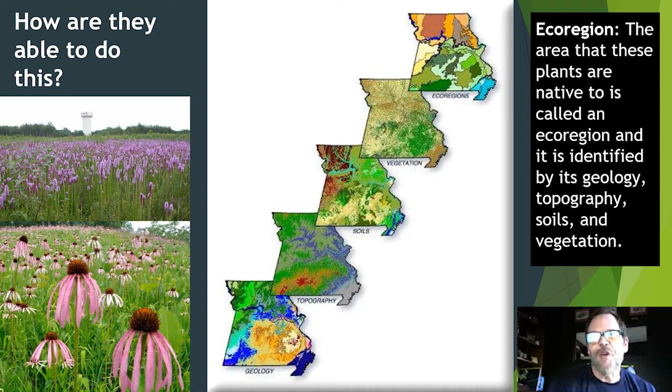So we walk through and we talk about the effects on our local waterfowl, on our local birds. We talk about the different things with our local insects, and how just planting these areas with natives is not only great for the environment, but affects all the things in that environment.

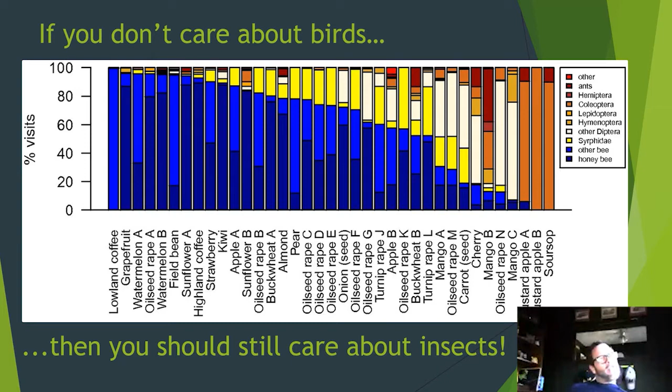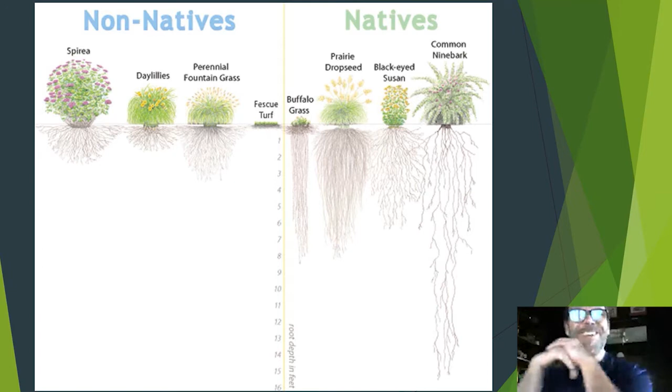Again, because of our soils here, we explain to folks how they root down. When you plant mums or something you picked up at Lowe's, the maturity of these plants as they grow takes some time, a couple of years in some cases, but once they take root in these spots, especially in rain gardens or adopted spots, they do exactly what we want. They start breaking up our clay soils and letting that water penetrate and percolate down into the water table.

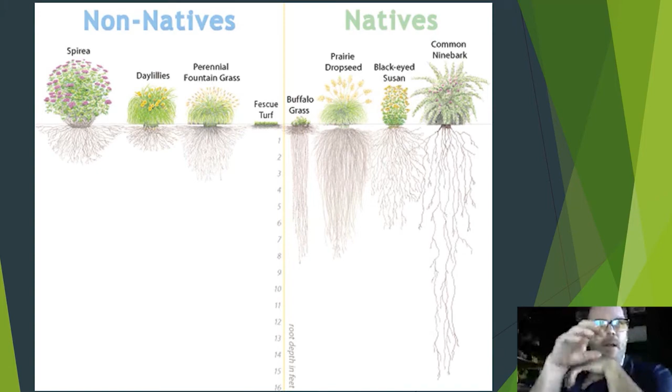We have a great group we work with called Grow Native. They're a local organization, all throughout the state, and they work with different local nurseries and in some cases big box retailers to sell their native plants. We encourage our folks to go out and purchase those plants for the adopt-a-spot and rain garden locations.

This is most of the information I'll get to you after we go. This is their database that we use. We have a list, and we use this list off of here, and we also have a written list, which I'll give to you guys, that we give to our volunteers for where to buy and what they can plant.

This goes into a little bit of detail about how to plant them, and again this tells you where all the retailers are.

One of the biggest issues we have is some of our spots, especially not the rain gardens, people can pretty much plant what they want. We have a very strong core of volunteers. I'd say out of the 100 locations, probably about 80 are very well maintained. Retirees are one of our best, we have a lot of retirees here in town, folks that grew up maybe on a farm or grew up gardening, and these spots appeal to them, especially our rain gardens. They're more off the road, usually set back a bit. These areas become more adoptable, more friendly for families, groups like Boy Scouts, Girl Scouts, when we adopt them out.

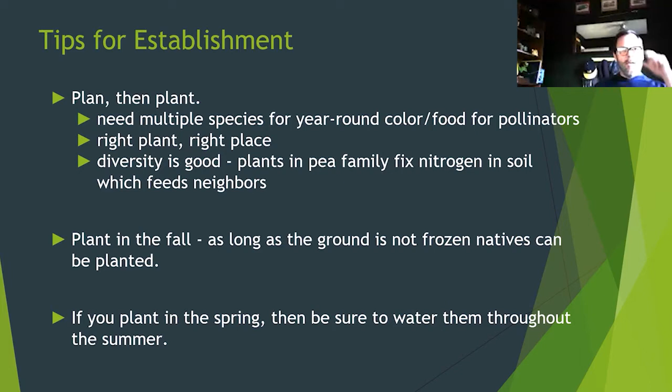We have over 101 beds and 96 of them are adopted. That's a 94% adoption rate. We do provide, through our folks that are in the Adopt a Spot program, a small stipend for their spot.

The $50 that we give them, we encourage them to purchase native plants. In some cases in the past, working with the University of Missouri and different local colleges, and actually one of our local high schools that has a greenhouse, we paid them to grow native plants for us in their greenhouses.

Once they were grown and ready to go, we put an alert out to our adopters citywide and said, hey, we've got 100 of X or 200 of this. They'll work in rain gardens. They'll work in this location, dry, arid locations. They don't need a lot of water. Does anybody want them?

We're always trying to give them opportunities to know that we're there to assist them. But most of these spots, once adopted, unless there are some major questions or someone needs assistance, staff will be made available. We give them their stipend, their location, and the encouragement, and we let them go.

Next slide, please. We also use this as an opportunity to talk about using our drinking water to water plants. In some of our locations, we have water installed - it's a bigger program than just the rain garden program.

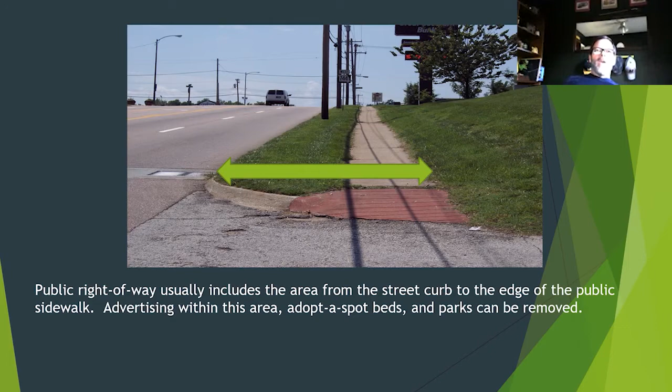We have a great program, and how this ties into our volunteer program is we have a program called Volgistics. If the volunteers are assigned a spot, they're logged into this program, whether they're taking care of roadside litter cleanups, an adopt a spot, or an adopt a rain garden.

They can go into this, schedule their time, say what they did, leave us notes, ask us questions, record their hours, and record how many people were there.

One of our other big events is Clean Up Columbia. We also use Volgistics for that. We have over 15 to 1,700 people citywide go out and clean the entire city, including all of our adopt a spot areas.

The thing about Volgistics, and the reason I use it, is it's a great tool for us when we have to report all our MS4 numbers, because I'm responsible for that in our partnership with the university and the county. So when we do our end of year report to the Department of Natural Resources, keeping track of this with Volgistics covers education, public education and outreach, when you think about MS4s.

So you don't have an adopt a rain garden program, but I bet you might have an adopt a litter program. How many people are participating? Are they picking up litter? How many bags are they getting every time? We keep all of this in Volgistics and they report it. This all goes on our MS4 because it counts. Even if I didn't have the adopt a rain garden program, every litter cleanup, every adopt roadside, that all counts for our MS4.

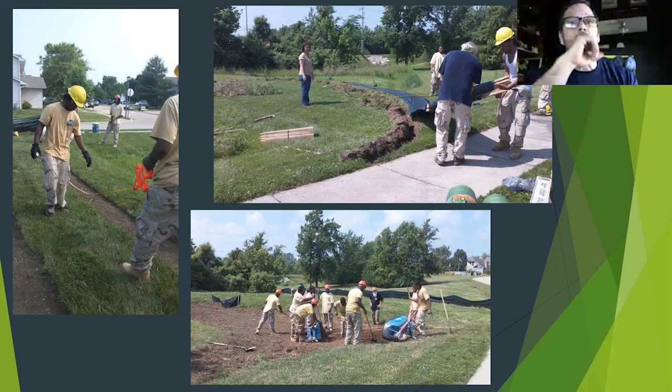This rain garden, after our first rain—we were so excited. We had a local group, and I'm always looking for opportunities to get other people involved. We had a local construction group that teaches young men and young women in the construction trade.

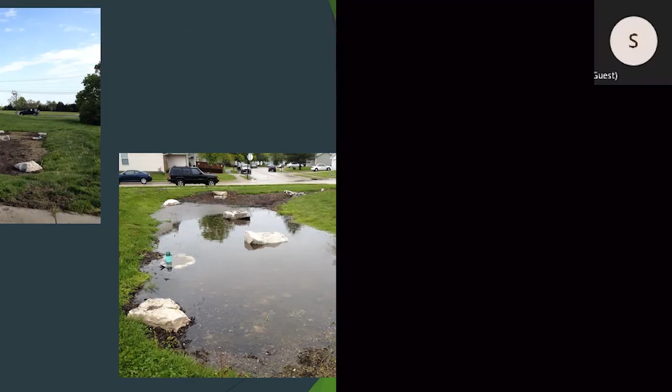When some of these are built, I look at it as an opportunity for us to train the next generation of construction folks: how to install silt fence correctly, what a rain garden is, what retention is about, and why we need sediment ponds on our plat when building or constructing a neighborhood or house to collect runoff.

I'm always looking at these as opportunities to educate the next generation, whether it's landscapers or local construction industries. The other thing that's great with the firehouse locations that are adopted is because of our MS4 permit and our regulations and what we have in our ordinances.

As I said, there are 600-some odd stormwater BMPs citywide. Only 125 or so are owned by the city and maintained by them. The rest of it is for the public to report, inspect, and maintain, and we get those reports once a year.

But these sites have been great for us. We've even had some of our volunteers go meet with folks that own local business buildings that have these installed, and help them, or help the landscaping company, understand the maintenance behind them. It's been a great program. It helps us keep in compliance with our MS4 permit, and it also helps us meet our goals for our climate action plan.

We have a question about Bermuda grass or Johnson grass, since those are invasives here in Texas. Do you have any problems with those?

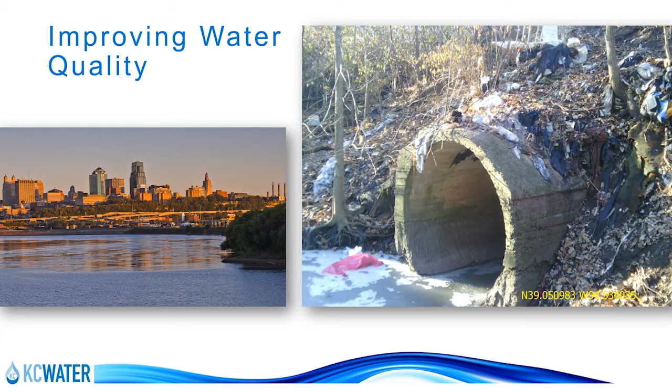City of Kansas City, Missouri is a Phase 1 MS4 community, but we're also a combined sewer community, so we have a little bit of both. Our city footprint is 319 square miles, with a population of around 500,000 within city limits. Our metropolitan area is over 1 million people, so we have a lot of areas to deal with.

We're basically taking it one step at a time, one foot in front of the other, to keep it going. So the projects I'm going to talk about today are mostly focused in our combined sewer area. They're part of our federal consent decree program, called our Smart Sewer program, where we're building green infrastructure in large part to capture stormwater before it has a chance to get into our combined sewer system and cause it to overflow down the line. These projects are helping us reduce the number of times our system overflows, and when it overflows, it mixes stormwater and sanitary sewage waste into our river.

Unfortunately, many cities across the U.S. are dealing with this problem. It tends to be the parts of our city that were built before about 1950 or 1960 that are the areas where we have combined sewer.

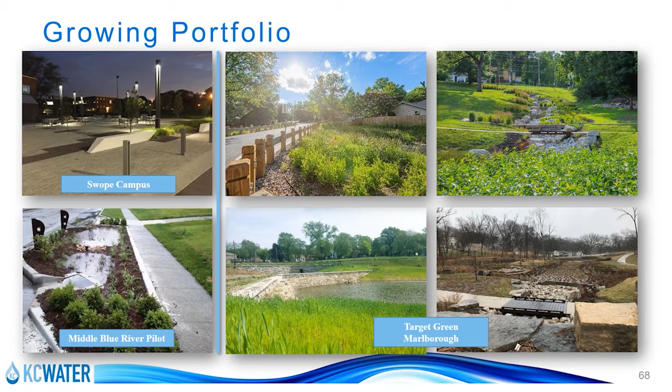Our latest projects coming online were all part of our original consent decree to try green infrastructure in different contexts—in industrial areas, in downtown areas, and in our more suburban character neighborhoods. So a whole variety of different environments, seeing what technologies we have good luck with, and which ones we build and then learn over time, adjusting as needed.

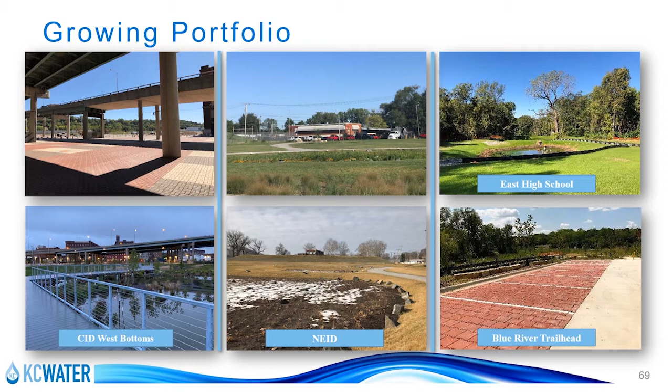Okay, so now into the meat of this presentation—this is really just a primer of different things to think about when doing green infrastructure projects. From my perspective as a landscape architect, one of the things our profession can bring to these projects is to try to make them community amenities, something seen as an improvement, an upgrade, or a benefit. So we partner with the engineers, each handling different parts of the equation, working together to create a cool project.

Beauty is subjective, and Mike hit on the importance of education—everyone has their own definition of beautiful.

Like he mentioned, there's that country club look, but then we're also in the tallgrass prairie ecosystem here in Kansas City, Missouri, and that has a very different look, which is what our climate and our natural world is already pre-calibrated to support. So we're fighting it every day trying to do different things. Finding a balance between some of the more wild elements and some of the more artful elements of the projects.

Most of these tips I'm talking about are going to make the most sense in the urban and suburban context. If you're doing a project in a remote or rural area, you sometimes have a little bit more design freedom or opportunities to lighten up on some of these tips I'm giving. But if you're in an area with a lot of people around, high traffic areas, people driving by it a lot, the expectations are a bit higher for what these facilities look like.

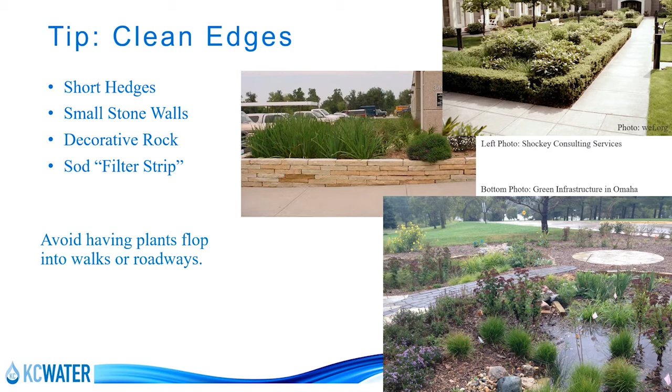Some of the things that can really help: keeping your clean edges, things like short hedges or small stone walls, decorative rock. These images show some design elements that have really helped make these facilities more appealing. And keeping plants from flopping into walks and roadways - that's sometimes the number one thing that can lead to calls, when people trying to walk into a building have plants flopping all over the place and they're having to step around them and step over them. That's never a good look. We don't want that.

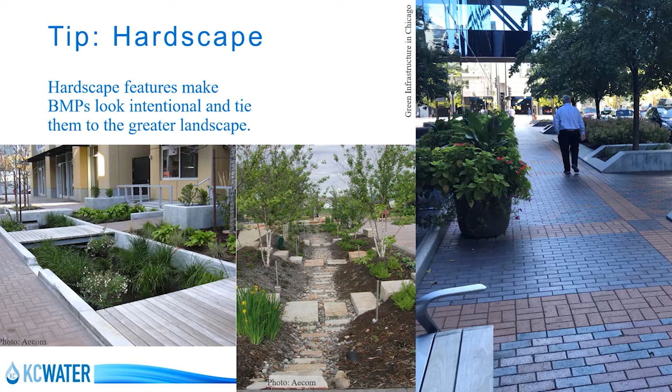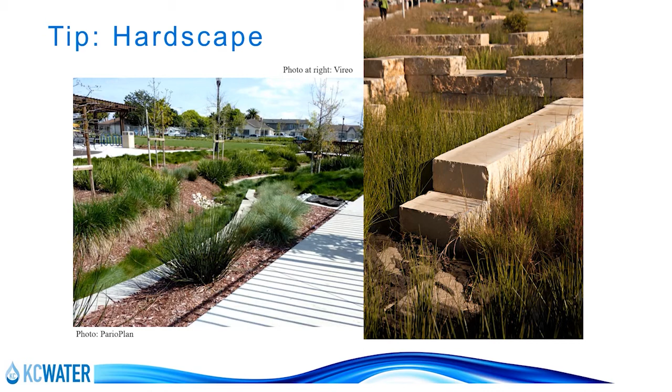Geometry - I can't stress geometry enough. This is something that sometimes gets overlooked when we're in a hurry to make sure the engineering and function of a facility works. Sometimes it can end up just sort of a blob shape, and sometimes that's appropriate, that works, but other times you really need something that creates actual design elements. These images are examples - in the facility on the left, one of our newer facilities we just built, you can see how that boardwalk creates an interesting contrasting design element. You've got all these curves throughout the site, and then this one boardwalk with different angles comes through and creates a really interesting site to visit.

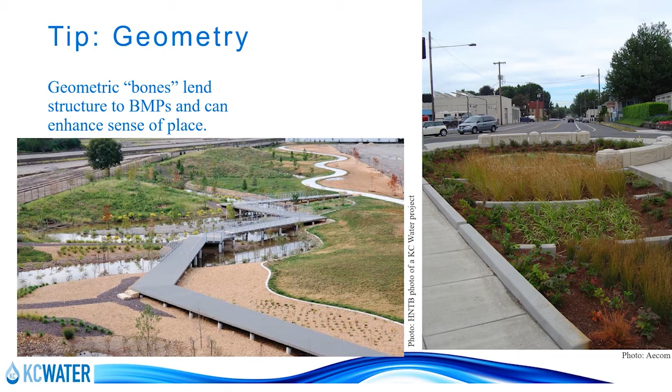I think a lot of it is not forgetting this classic design theory. We use it in design of other landscapes, but early on in green infrastructure, we were trying to get all these other things right - the ponding depth, thinking about what plants will survive. So some of the classic design theory got a little bit lost. The good thing now is these technologies are becoming much more familiar, so it's easier to start bringing those design elements back into the picture.

Things like curves that are intentional and dramatic. You can use an arc—sometimes in a design, just including one really well-placed arc shape can really elevate the design.

So this is kind of my shameless pitch: include designers in your projects. If you have a team that's all engineers, having a landscape architect, or sometimes an architect, on that team can bring some of these design elements into the project and make it something with lasting impact, something your community will value and treasure and keep around.

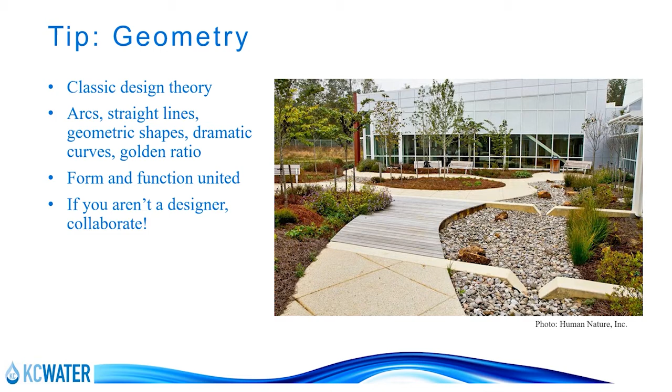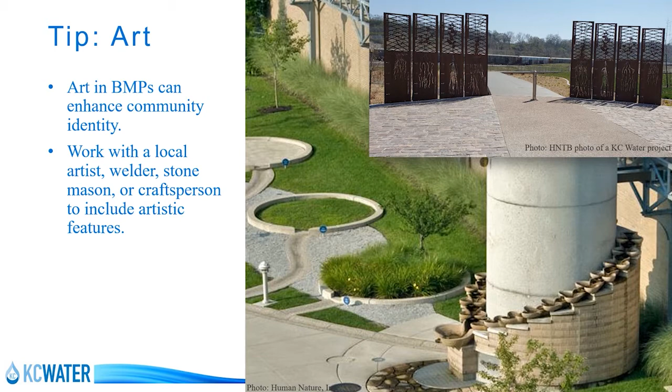So, plant selections—Mike already touched on some of this. In our projects we do a combination. The hardworking part of the facility, the basin or lowest part that ponds, is the toughest growing environment because it fluctuates wildly from dry to wet. Those are the areas where we really want to use deep-rooted native plants.

Around the edges, we look at the context of the site. If it's an area with lots of daylilies in the surrounding landscapes or people's properties, we'll include some daylilies, taking cues from the surrounding landscape in those plant selections. Part of it is easing people into it, instead of coming in all at once with a big patch of big blue stem—taking baby steps.

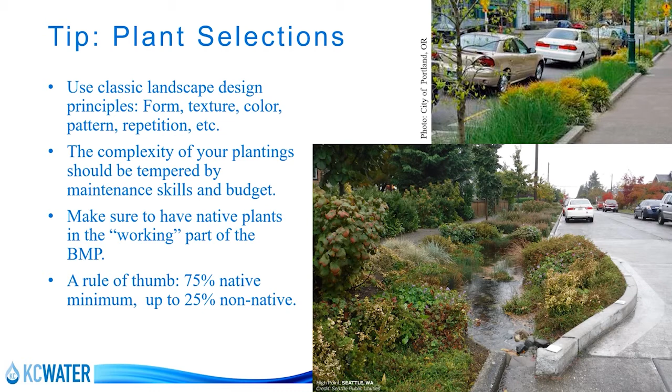As a general rule of thumb for these facilities, we target a minimum of 75% native plants, with up to 25% non-native plants, usually located around the edges. As for trees—there was some conversation about trees in the Q&A from the last session—tree placement in these facilities has to be done with care, by someone who knows what they're doing.

There's different products out there. Ours happens to be one called Silva Cells, where we're trying this very technique. So very excited to see how it develops and to see how our trees do.

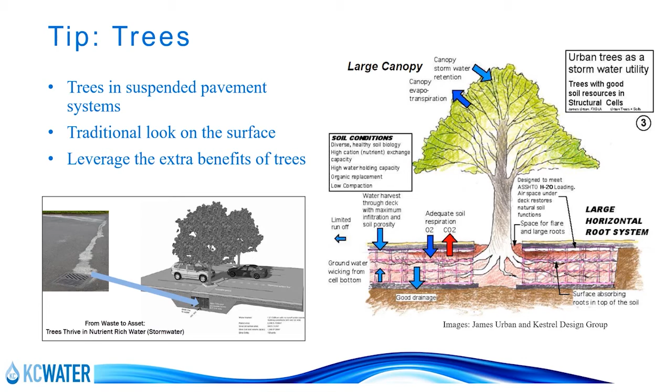And water features. It's hard to find someone who doesn't like a fountain or a water feature. I'm sure they're out there, but waterfalls, fountains, streams, these are things that often can be soothing, a little break for especially these challenging times we've all been in the last couple of years. There are all kinds of ways you can do this, from complex to really simple.

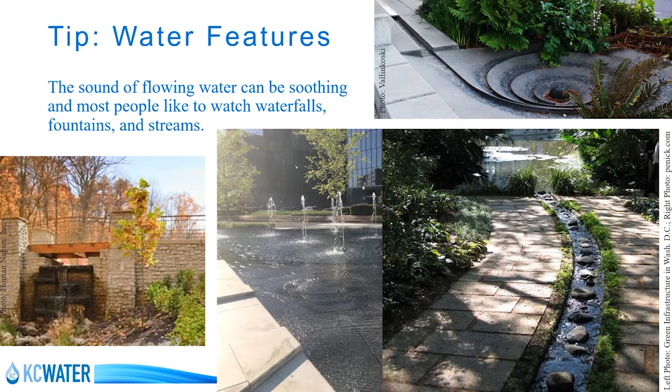The image over on the left, in this case, they've got a small spillway that was on a pond. Instead of just having a concrete spillway, they took stone and created these little ledges that stick out, and that created a waterfall. So it's as simple as that. Probably didn't cost that much more to do it, but instead of having just a concrete slide that gets stained with algae and looks pretty horrible, they have this neat waterfall feature. That's what good design can bring to a project.

Sometimes it can be a facility that only is going to look like a water feature when it's raining, or for say 3-4 hours after it rains. Some of them could, if you have the maintenance capacity and it's a high priority area where you have a lot of visibility and people that could enjoy it, be worth using some recirculating pumps and a small UV filtration system for your stormwater if you want that water to be something that people can interact with.

So the example up in the right, this is one of our facilities where we have sewer separation upstream, which brings the water through a pretreatment device, a hydrodynamic separator, and then the extra water goes down this beautiful cascading feature, goes over a series of limestone weirs, and when it's raining, and then for an hour or two after a rain, it's a beautiful waterfall. This could have just been a pipe, right? But would we have created any kind of amenity? Would we have provided any water quality benefit or those other co-benefits that come with keeping the water on the surface?

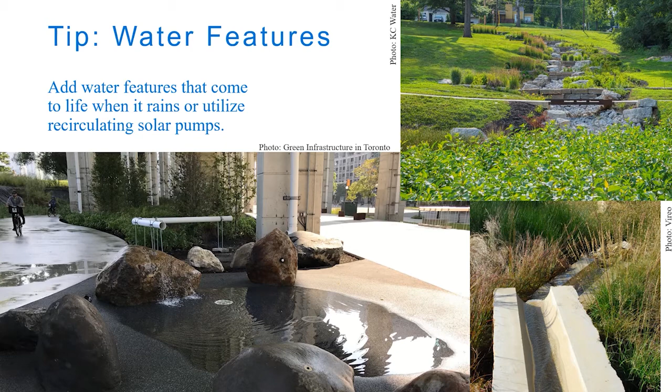This example down here on the lower right, I think, is the Oregon Convention Center. I just think this is such a neat example where they take the water that comes off the roof, it goes through this structure, which then lets the water fall down into this kind of obstacle course of waterfalls where the water moves through the site and just creates a really interesting facility. You can picture if it didn't include that element, it would still be a nice planting or foundation planting, but this elevates it to the next level. Not every site is going to warrant this type of treatment, but some do, and there's some really great precedent examples out there.

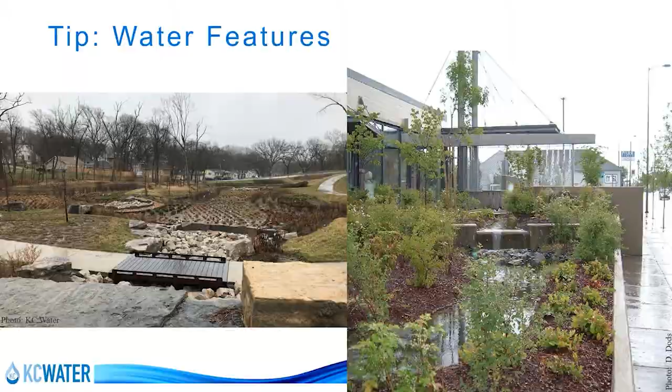Sometimes in early cases, people would keep a flyer and later show it saying, hey, this is what you showed me this was going to be—then point to what we actually have, and it wasn't the same. So it's important to manage expectations from the start. We don't want to overpromise and then underdeliver. That's never a good look for anyone building a project.

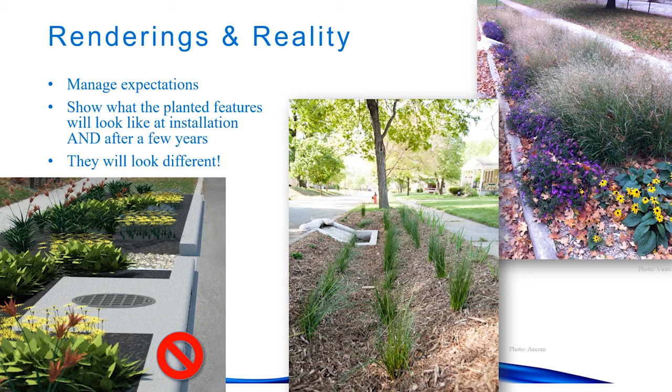Part of it is showing pictures of actual other projects, showing what they look like at the start. This picture in the middle is a newly planted, very simple rain garden. A couple years later, it's not the same rain garden, but a similar one looks really different. If people can see, okay, year one it's going to look something like this, but 3-5 years down the line this is our target—it helps people not feel like they're getting a bait and switch with something very different than what was promised.

And then getting community feedback—this hopefully goes without saying. It's really important to understand, in each community you're working in, what are the important things for you to know about the context where you're putting that project. Is there a big speeding problem? Is there a problem with litter? What are the different things going on there?

I think it's really important to offer different ways that people can give feedback. This is something our communications planners down the line have really driven home—it's important to give opportunities for people to also provide confidential input, so they don't feel like the only chance they have to talk to you is in front of 50 of their neighbors who may not agree with them. Give a chance, so if it's an in-person meeting, comment cards; if it's an online meeting, give them an email address they can follow up with for private feedback.

Sometimes, and I've seen it happen, you have a group of 10 people and one person doing all the talking while everyone else is sitting there rolling their eyes like, this guy doesn't speak for us, he just keeps running his mouth. So it's important to pick up on that to get an actual pulse on what's important in this project, what problems they're having that we can help solve, and are there any deal breakers—anything they really don't want to see in this project.

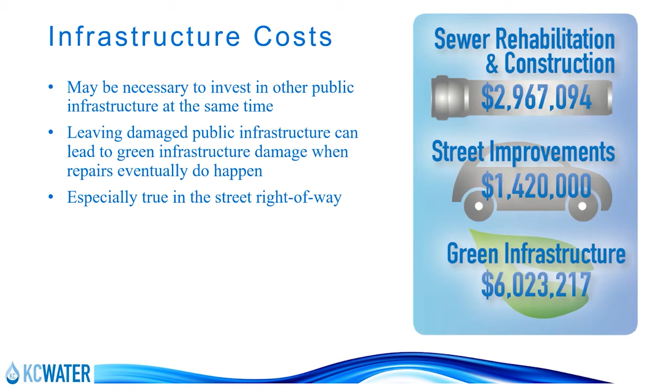So, complete the picture.

In this example here, go ahead and push advance. It should give us a little animation. Okay, so in this situation...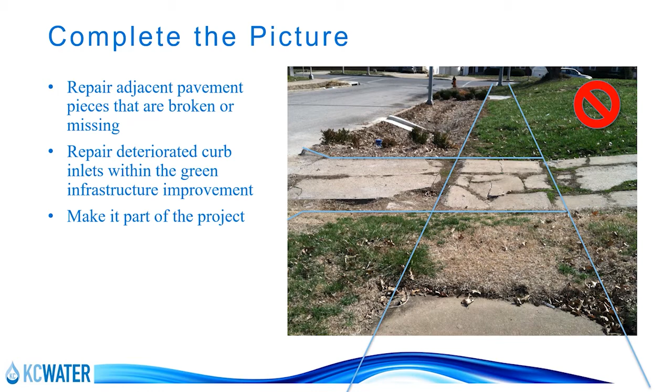And of course, maintenance costs and planning. So a project, one of these green infrastructure projects, can't exist without maintenance. It won't last very long. It won't be there very long. So to do one of these projects, you have to factor this in.

Clearly defining expectations and getting that all hammered out during the design phase of the project, so you don't want to have it built and then start thinking about maintenance. I think everyone knows that, but then sometimes these projects happen and it's like, oh, well I thought they were handling it. No, I thought they were handling it. And before you know it, there's no one lined up to take care of a facility. So really important to plan for that up front.

And these ballpark figures have held true for us for about 10 years, which is interesting. Part of me thinks that's a combination of, as there's more contractors familiar with this, we're getting a little bit better pricing, but at the same time, over 10 years, prices go up. So maybe that's how it's held more or less steady.

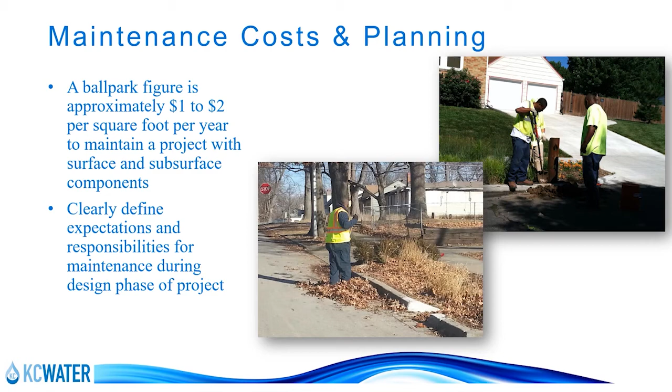But if you're doing a budget, that's a budget number you can use, and it's gonna look high to you. But if you're doing a capital improvement and you're gonna have contractors or city staff maintaining it, that's, at least for our region, a reasonable budget number.

We don't want that to be the first time that your business owner next door or your homeowner finds out that there's a project coming. It's never a good way to start off a project with your constituents.

So some of the ways that we do this, we use door hangers. Door hangers are a tool that doesn't seem to go out of style. It's always helpful if you have a situation where you don't have contact information for people, but you need to let them know something. The contractors sometimes use these door hangers, and our maintenance crews as well.

Signage, Mike hit on this a little bit, but signage is really an important element down the line once the project is in maintenance. Having a sign that tells people, hey, this site's here on purpose, and if you have questions, here's a number to call.

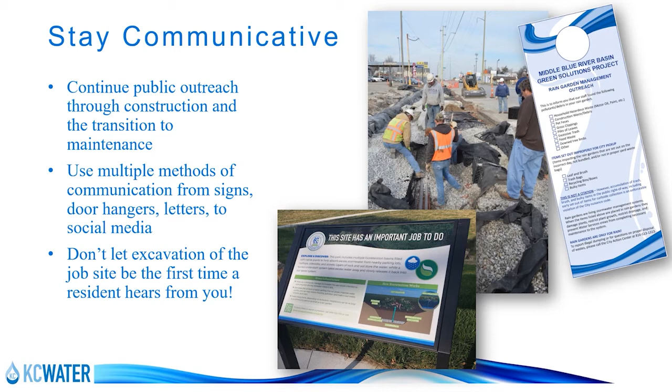Or like on this sign example, some people like to use the QR code to find the website that has the form they can fill out. So different ways for people to reach out to you.

And erosion control. So this is one of the big Achilles heels of green infrastructure projects. It can really make or break the construction process and can be the determining factor as to whether you have to...

Redo something during construction. So the SWPPP, which I think probably most everyone here, if you have an MS4, you're used to dealing with SWPPPs. You know, the SWPPP is great for helping us keep that muddy water from leaving our site, but it really doesn't cover the muddy water moving around within the site, because that's more a function of your contractor's site activities within the site. So a couple things we've learned: it's really important to define on your plans or in your specs who pays for erosion control work within the site.

Better yet, build it into your plans and show what you're going to be requiring. We've had situations where cover crop is specified, which is a great tool, but if your timing's not right, say you've got this big mud pile in January, cover crop probably isn't going to do you much good, at least not in our climate.

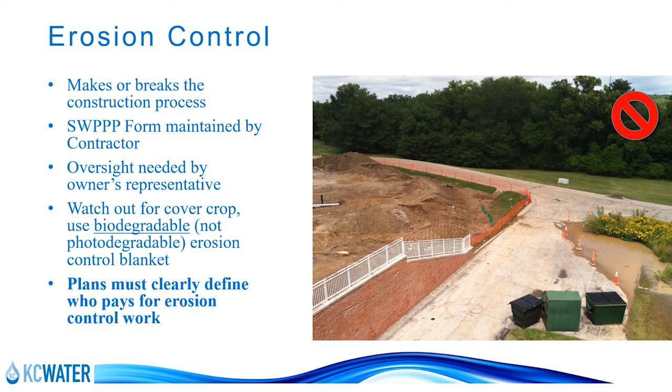Another really important factor here is optimizing porous pavements. We see porous pavements used sometimes in places that don't make any sense. We learned the hard way on our very first project that sidewalks are not a very manageable spot to put permeable pavements. There are always exceptions to these guidelines, but as a rule of thumb, parking lots are really the best place to use porous pavements. It's just the most optimal, cost-effective way.

I'll add to that: a parking lot that has a contributing drainage area that doesn't contribute a lot of mud, or one that you control. If you have a parking lot on one parcel and right next door there's a big hill owned by somebody else and all their water flows onto your parking lot, that might not be a good spot for permeable pavement, because if that hill gets destabilized and you get a big mudslide, it's going to clog up your system. So they're not a panacea. It's really important to use permeable pavements where they make sense, but where they do make sense, they can be great.

My personal favorite are permeable pavers, like you saw in some of our other pictures, because they look like an upgrade, something that your average person associates with something nice. Sometimes with our other porous surfaces, like the concrete, we had someone in the pilot project early on say, why are you giving me this cheap concrete? It's not cheaper, but it looks different. With pavers, people don't usually say, hey, why are you giving me this cheap thing. They might have other questions, but pavers are generally accepted as an upgrade.

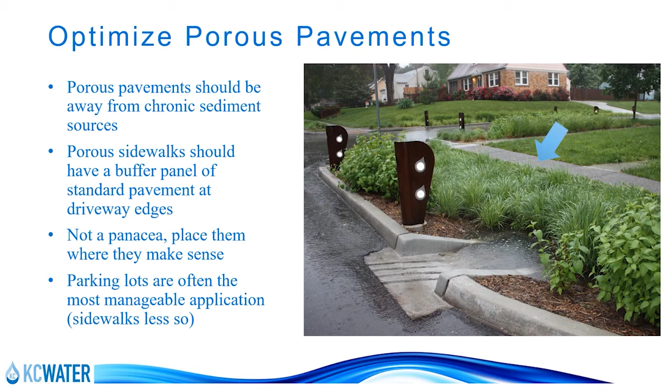And then pretreatment. Pretreatment is really important for these facilities. Sometimes it's as simple as a little spot for some of your large trash and sediment to settle out, but it's really important that they're designed properly.

So retrofits were important to go back in and fix that. We lifted them up, basically jackhammered out the bottom of those little concrete bathtubs, built a block wall a few courses high, I think three courses up, and then filled that with gravel with a few flagstones on top so we can scrape out the sediment. We got that idea from Omaha, so we've really valued the input they've had on pretreatment. They've done a lot of really neat experiments with pretreatment, so if you're interested in pretreatment, I'd reach out to Omaha.

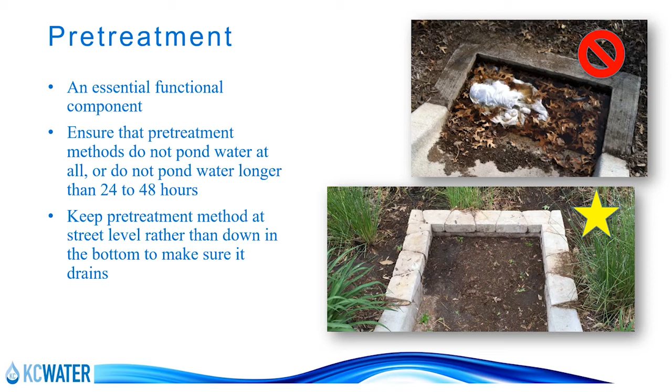Intersection sightlines are another Achilles heel I see on some projects, where the tall plants are too close to the intersection, and then you get calls and complaints, hey, I can't see at this intersection. It's a little hard to tell in this image, but there are some taller grasses in the middle that had to be trimmed. It doesn't kill them, and they do still put on a seed head and just grow back a little shorter, but it's extra work.

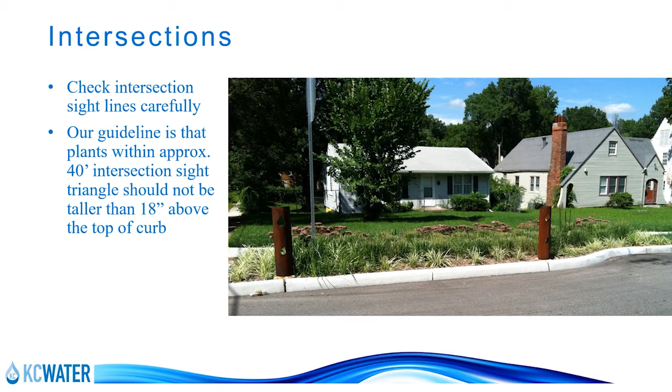At intersections, the guideline we use is a 40-foot intersection sight triangle. The plants within that area need to be 18 inches tall or lower from the top of curb height. If there's no curb, then 18 inches from the top of the road surface.

Here's some resources. I recognize these links won't work right now during the webinar, but when Krista sends the slides out afterward, if you're looking for information, you can click on these links and check out some of our resources. We have a manual, which includes a lot of the things I talked about today—we worked really hard to gather all these tips, along with many other things including construction details and specifications. We've also got a few other great resources on our website, so I encourage you to check it out if anything you heard today was of interest.

Thank you. Thank you so much, Lisa.